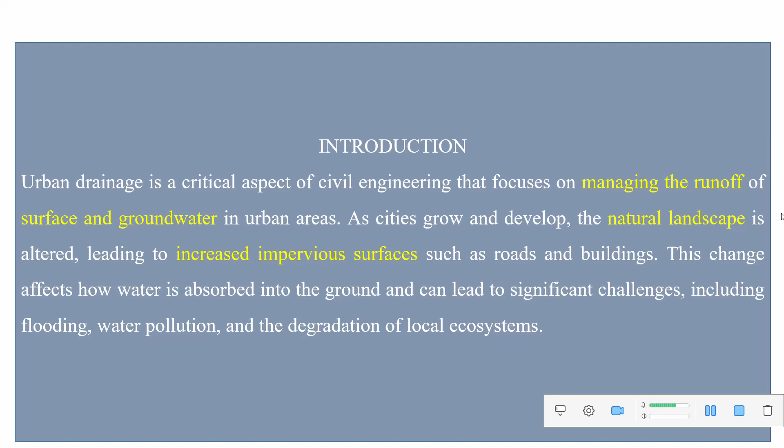Now let us see the effect of urbanization on urban drains. We earlier discussed increased runoff: when buildings are constructed and urban infrastructure like roads is put in place, surfaces become impervious, which reduces the rate of infiltration. As infiltration is reduced, runoff is increased, and when runoff increases there is a high tendency of flooding.

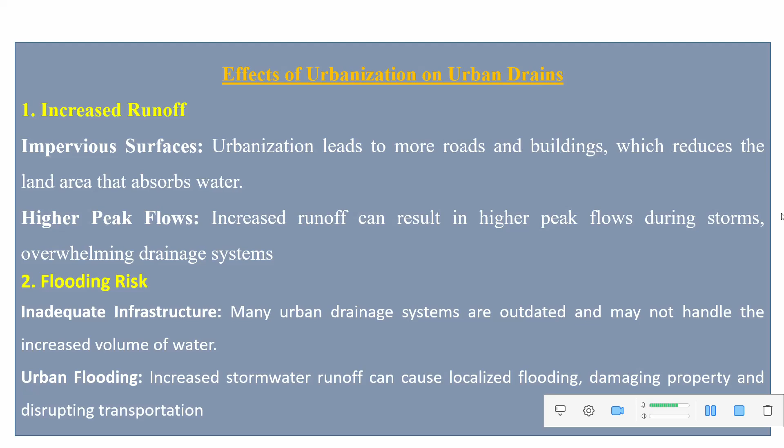Also, many urban drainage systems are outdated and may not handle the increased volume of water. Drainage systems constructed in the late 60s cannot handle the volume of water now. Why? First, the rate of infiltration of water into the ground has been reduced. Second, there's climate change effect, where the intensity of rainfall keeps increasing. This creates a cycle that increases runoff, and when there's a high volume of water with a small drainage system, it cannot hold the water, and we start talking about flood.

Another effect of urbanization on urban drains is water quality deterioration. On the pollutant loads, urban runoff often contains pollutants such as heavy metals, oils, and nutrients from fertilizers. Impact on water bodies: polluted runoff can degrade nearby rivers, lakes, and waterways, harming the aquatic ecosystem.

So here we are seeing the importance of the construction or the existence of an adequate drainage system. We are seeing the effect of the inexistence of an adequate drainage system, like water quality. We are talking about erosion and sedimentation. If you come here to the city of Limbe, you will discover that most of the coastal areas are facing an erosion stage due to flood.

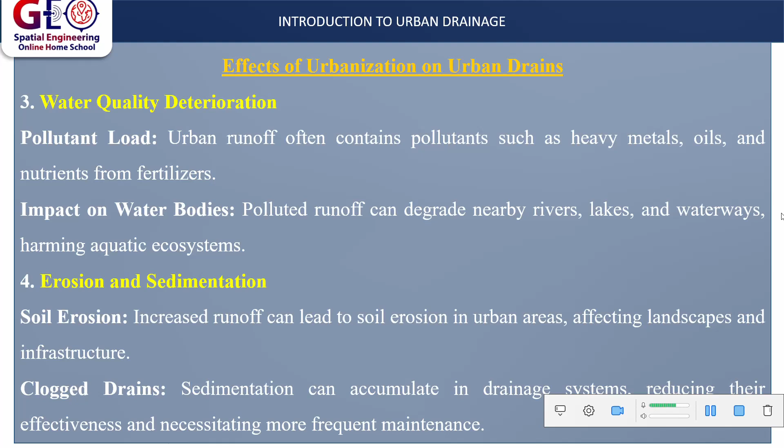Now, reduced groundwater recharge. This also goes in line with the disruption of the natural cycles of water. We know when rain falls, it infiltrates into the ground, and after that we can have groundwater. When we talk about water resource management, we are going to see how water can be used. Groundwater can be used as a good source of potable water, but because of the reduced rate of infiltration, we are now facing the problem of reduction of groundwater recharge in most cities. It is even more severe in the developed world.

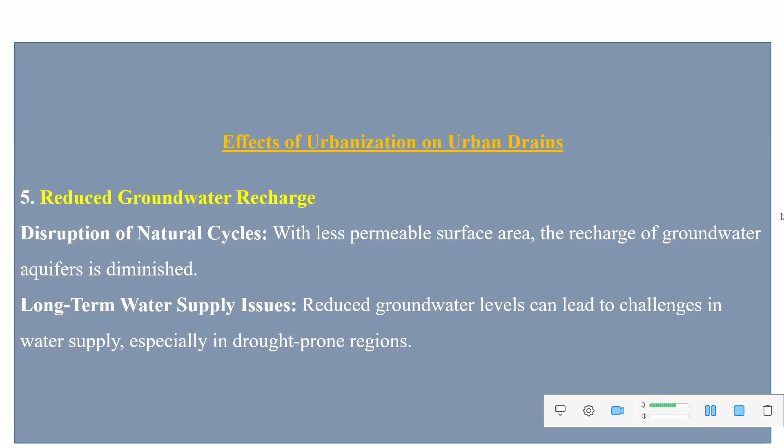Now, here we are going to see some cities in Cameroon that, because of the inexistence of an adequate drainage system, cannot handle the intensity of rainfall, and those cities suffer from the natural disaster flood, like the city of Yaoundé, where we constantly have flood. The general topography of Yaoundé is a mountainous city. So all those localities that are like a basin or in the lowland always suffer from flood.

If you go towards the post in Yaoundé, this image was taken around the post in Yaoundé. During the rainy season, this area suffers a lot from flood. It is true that we have flood everywhere in the developed and in the developing nations, but the problem we are facing in most cities in the developing nations is the inexistence of drainage systems and also the capacity of the existing drainage systems to hold water.

And again we leave Yaoundé and move to the economic capital of Cameroon. Here in the economic capital of Cameroon, looking at the width of most of the drainage systems that exist, it's very difficult to see a drainage system with a width of 4 meters and a depth of, let's say, 3 meters. It is very difficult to see such a drainage system.

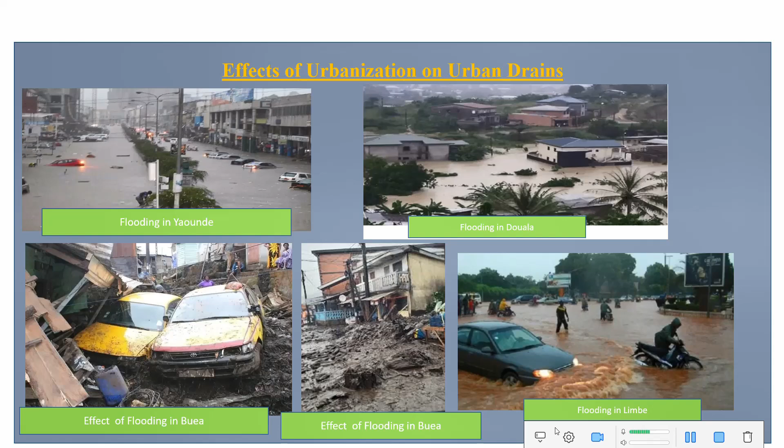Now, if we look up here, we are going to see the old degraded drainage system in the capital city of Yaoundé, around Corbiso. You see that this was an old drainage system that was constructed maybe some 20 or 30 years ago, and with time it has degraded. And when there's high rainfall, of course, it is going to overflow its bank and get into houses, since the drainage system itself cannot hold any significant volume of water.

If you look here, you will see a drainage system in the capital city of Yaoundé. This drainage system was constructed years back, which helps to channel the waters into the nearby rivers.

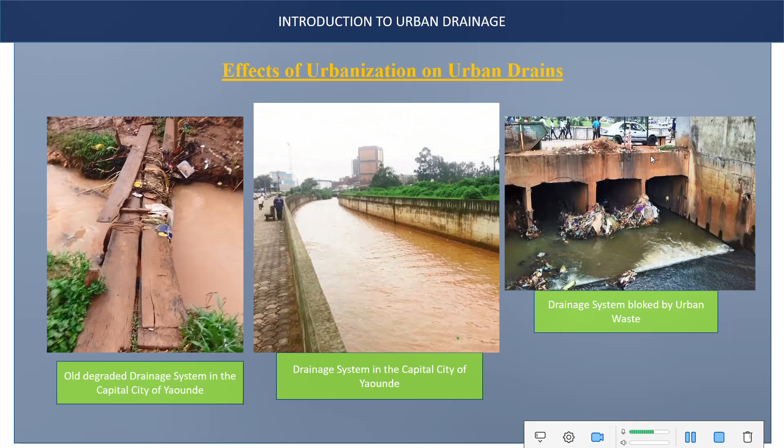Now, if we look again, we have another problem in the management of urban waste. That is a general problem we are facing here in Cameroon. Of course, management of urban waste is a whole specialty that can be found in civil engineering or environmental management. When we talk about environmental engineering, urban waste is one of the big topics. Now we are seeing an image where most of the urban waste has been dumped in the drain, and it becomes impossible for water to find its way to its destination.

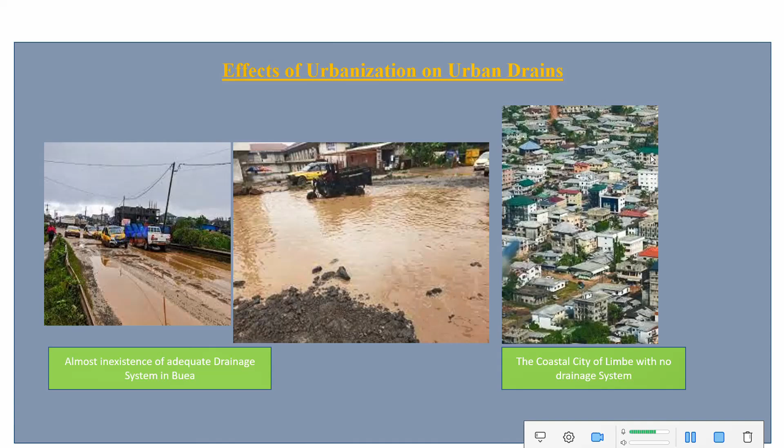So we are going to see how we can design. If we do not see it this year, of course, next year, which will be entirely practical, we are going to see how we can design industrial urban drainage systems and normal urban drainage systems in the town, and how we can link them to the nearby river streams.

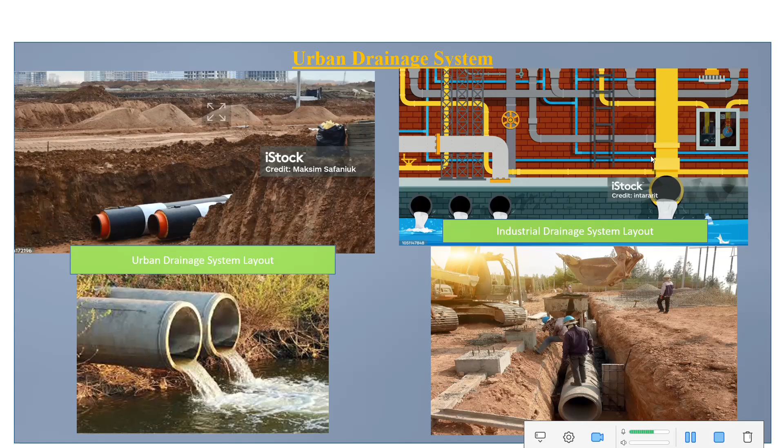So here we talk about urban drainage and public health. In human terms, the most valuable benefit of an effective urban drainage system is the maintenance of public health. We know that when there is no urban drainage system, there will be high flood, and we can all relate to the aftermath of every flood, which comes with a lot of malaria, and sometimes it goes into the potable water system and pollutes the potable water. And at the end of the day, we start talking about cholera and the rest.

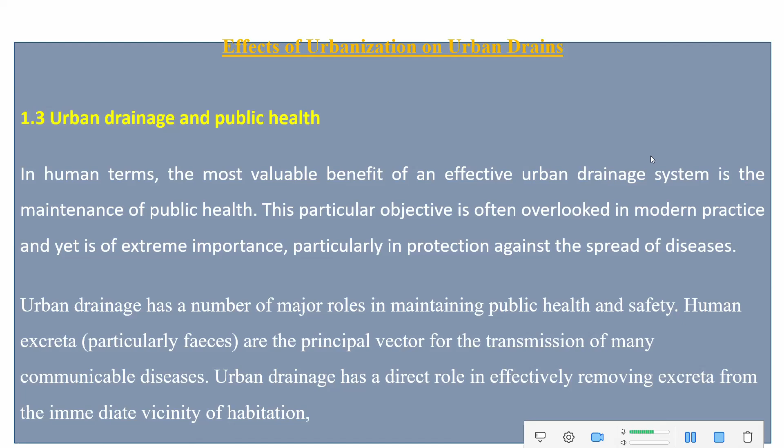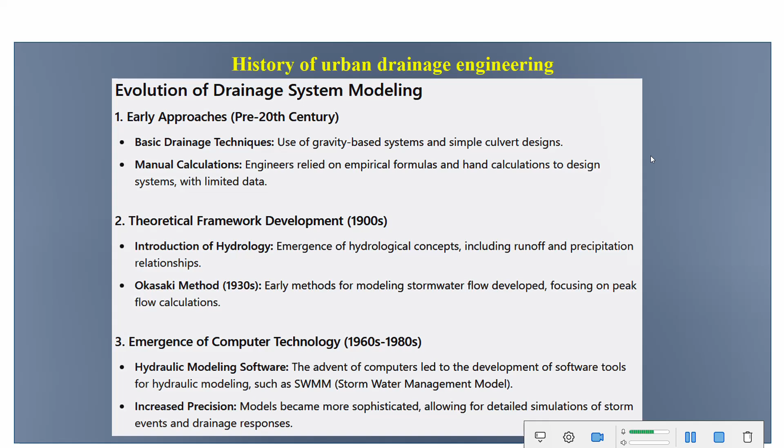It is a model that, together with HEC-RAS, is highly used today in engineering, despite the fact that it was developed in the 1960s to 1980s. It is still highly used in engineering in most countries, or they can use Civil 3D, but they highly use this one and HEC-RAS for modeling of drainage systems.

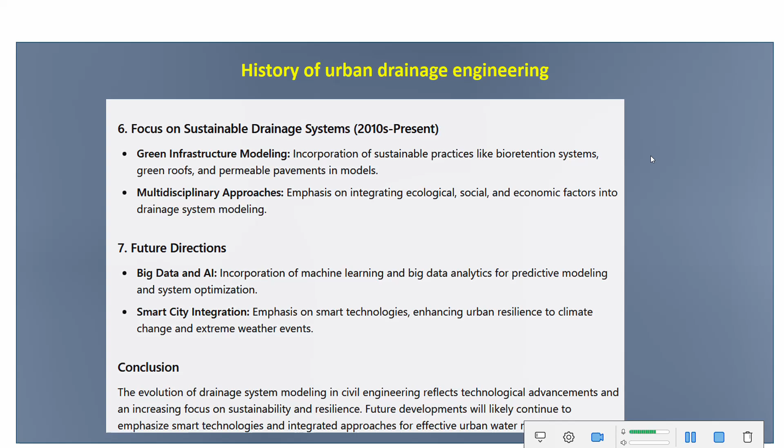But presently, we use our normal software to design a drainage system at a local scale. That is, we can do it in a quarter, and from quarter to quarter we do a chain. Yes. But in the future, we are looking for a way to work with big data and AI.

Okay, in the next class, we're going to talk about approaches to urban drainage systems. Under that, we are going to discuss the software used in drainage systems and their functionality. We are going to see how to model drainage systems. We're going to talk about stormwater management, how to treat stormwater, and a lot of modeling as far as hydrology and hydrography are concerned, and we're going to do designs. In our course we are going to do much software.

So we're going to do software design, most of it, but we had to give this introduction so that we see the importance of what we are designing. Okay, so our next class will be coming up to finish up with the theory. We are going to have a next video, a short video like this one.